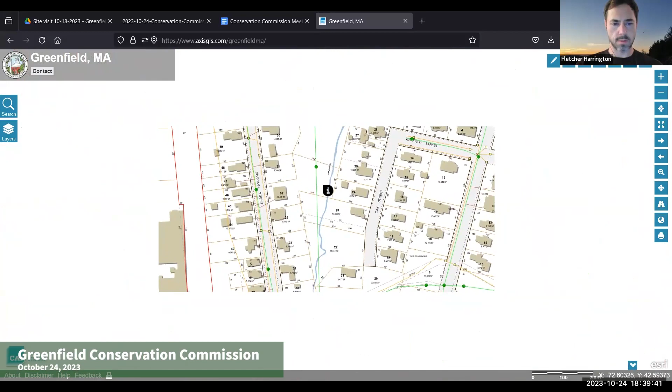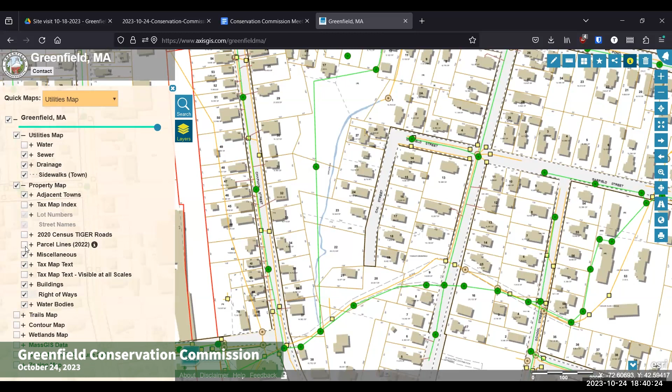Yeah, I'd agree with that. Definitely nothing running right now. And if it's not running right now, I do stream stuff for work, and all of our streams are extremely high right now, all year. Mitch, did you see a defined channel that was just dry, or was it less obvious? From the photo, it was just a stretch that was especially wet. Yep, that's it. Got it.

So it seems like, for Wetlands Protection Act purposes, it's probably definitely not a riverfront area. But if we think it's an intermittent stream, then it would be riverfront area for our local ordinance. Although, I'm curious, has this been delineated? Is there an identified bank? And if so, is there identified bordering vegetated wetland? What are the resource areas that we're looking at here?

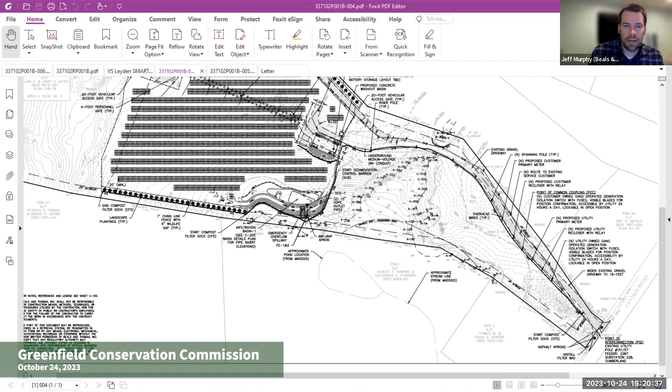And the next comment that they had related to doing soil testing to confirm these soils within the basins. So on October 11th, we went out and we did 5 test pits, 3 located in detention basin, or infiltration basin 1, and then 2 test pits in infiltration basin 2 at the west end of the site. And those test pits were done to confirm depth to estimated seasonal high groundwater, as well as the soil textures associated with each of those basins.

And we confirmed that we did have the adequate required offset, greater than the 2-foot minimum, to seasonal high groundwater. The soil textures that were encountered during the exploration were slightly different than our original design assumptions. So we updated the stormwater calculations to reflect the corresponding Rawls infiltration rate associated with that soil texture. And the basin design will continue to work as originally designed.

So I wanted to share a little more zoomed in view here of the basin, so you can see where that is. And the buffer zone here, as you can see, is kind of located just to the north of the basin, and it's situated here at basically the low point at the southeast corner of the existing hayfield. So our limit of work is entirely within the existing tree line, an area that's been mowed and maintained historically.

And our basin is located generally to fit the topography and the natural landscape, as well as the drainage patterns that exist out at the site, to really just work with the natural topography and provide infiltration and beneficial recharge to the adjacent wetland areas. And we have the outlet areas of the basin situated at a point farthest from the wetlands.

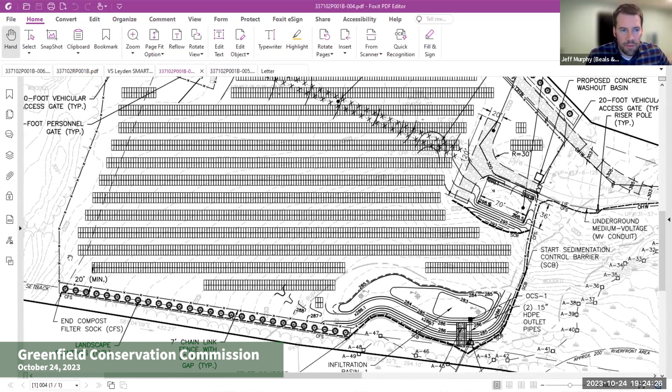One of the other comments requested confirmation of access to the basins for maintenance. So the detention basin 1 can be accessed primarily from the south. There's going to be a proposed gate here that will allow you to traverse the western edge of the array, and then along the south side of the array and get to the basin from that side.

And similarly, from this T turnaround area at the main entrance to the site, there'll also be room around the perimeter to get down to access the basin for periodic seasonal mowing and typical maintenance. And we also updated the stormwater report to go through, just documenting each of the typical LID considerations that are included on the stormwater checklist.

So I'd be happy to go through those if you would like, but in general, it's more just documenting the process we went through when working to develop the design of the stormwater basin, which is a fairly straightforward infiltration design.

And as noted, in addition to the Mass DEP comments, we also received a final letter from NHESP related to the state listed rare species, and the letter indicated that there would be no resulting take or adverse impact to the state mapped rare species.

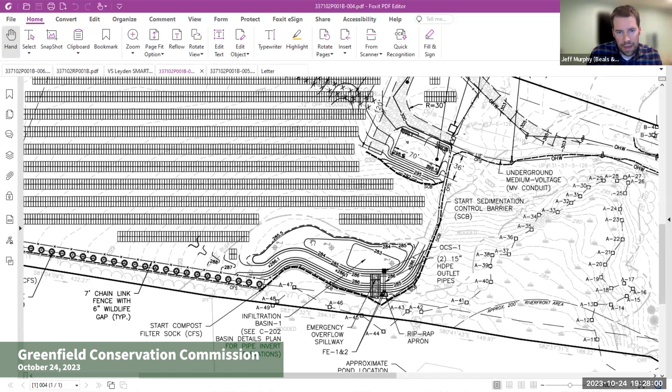So we're basically just going to build up an earthen berm, and then that water that flows across the grass meadow of the solar field will get captured here and directed down to this kind of low point, which the bottom of the basin is essentially set at the existing grade. So we're not really cutting down the grade at all.

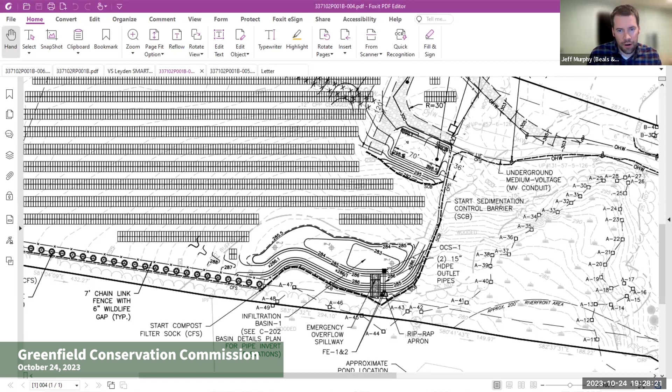It's more or less allowing it to just flow in the way it is today, but the berm basically will hold back the water, and then we have an outlet control structure here. Let me go back to that other sheet. The outlet control structure has a series of cutouts in it. So this is kind of like a front view of the outlet control structure. So it's going to allow water to pond up 4/10 above the bottom of the basin.

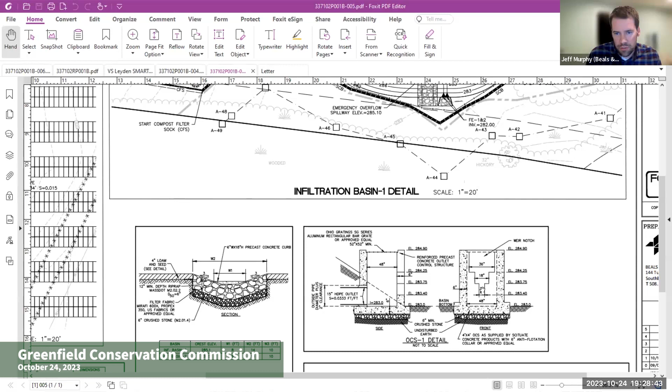And then once it reaches that point, it can start to flow out through these various notches in the outlet control structure. And then that flow will subsequently flow through two 15-inch outlet pipes into a riprap dissipation apron. So it really just tries to corral the water, and then it releases it in a slow, kind of controlled manner, consistent with the current drainage patterns.

And there's pretty minimal flow that'll come out of the basin, even in the 2 and the 10-year storm. So it's essentially going to be doing what it is today. It's just that we'll be allowing it to pool and infiltrate in this area, which will then kind of feed the hydrology of the wetland consistent with the current drainage patterns.

Thank you. I guess I was wondering if you could explain why you designed that infiltration basin to be within 30 feet of the wetland and not 50 feet or 100 feet from the wetland if you're already using existing topographic kind of subwatershed shedding.

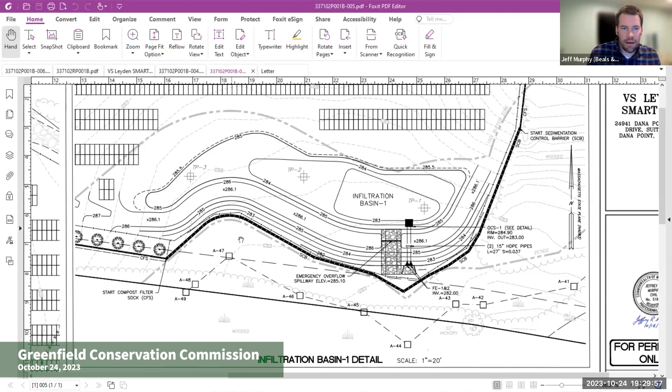I mean, it's basically an exercise of trying to work with the features that we have on the site and provide something that's going to reduce the amount of overall grading required. If we're trying to move it elsewhere, we may need to do more grading than what we have currently proposed.

So we're trying to just allow the water to flow to the area that it naturally wants to flow, and then just create that berm at the down gradient most point, because that's where the water is naturally getting collected, and it requires the least amount of grading and redirection of water to have it where the water is naturally going right now, if that makes sense.

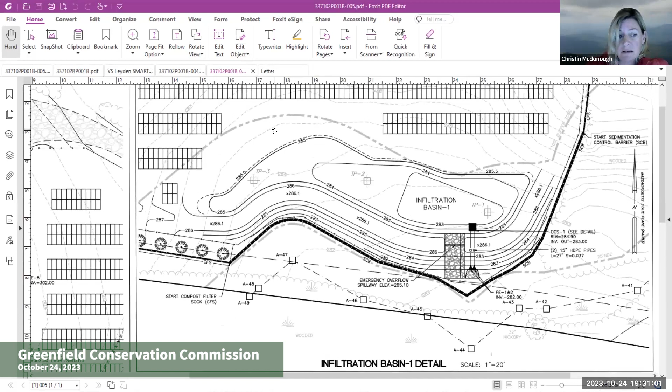And then can you just talk about the pretreatment? I imagine you're meeting all the performance standards, but can you just touch base on that? I don't know if we have any members of the public present, but there have been abutters present who are concerned about this in the past, and I just wanted to make sure we're addressing that publicly in a hearing.

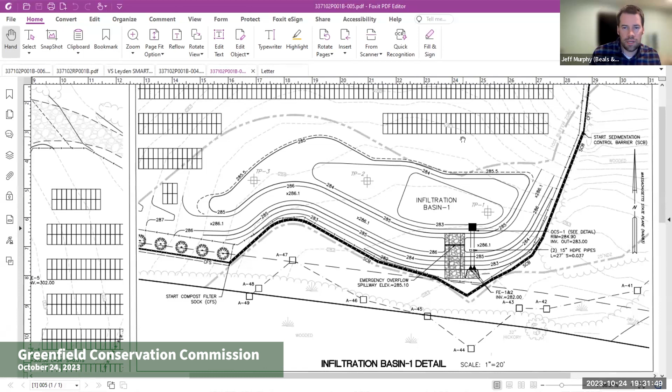And the basin itself allows for TSS removal and treatment of water as it's coming off of the site, and the grass vegetation will help that as well. Can you give us the percent of TSS removal? Are you meeting 80%, 90%? So yeah, the basin will provide 80% TSS removal by virtue of its design, the infiltration basin.

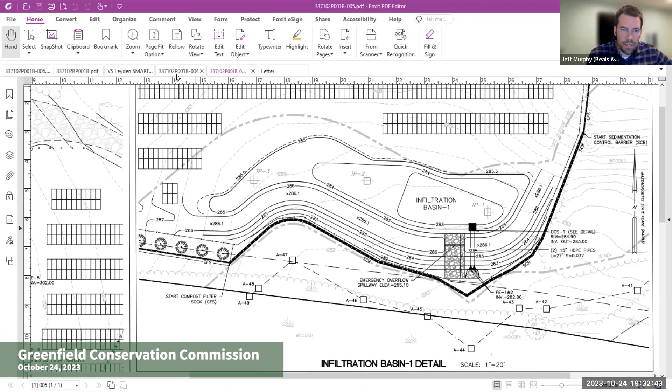And we're not proposing any paved areas that would require typical methods of treatment. We're not going to have a paved parking lot where you would be required to have catch basins with sumps and things. It's all going to be vegetated with grass, and our access road is going to be gravel, located on fairly level terrain, and all the runoff from the road is going to be directed to the basins for the most part, within the array area.

I had a couple other questions. Sorry, guys, I'm being an oxygen hog. Go for it.

So you said you received a comment letter from Natural Heritage. Is that a take avoided through conditions or a no take? It was a letter of no take. So we had submitted it for the combined NOI and NHESP review. And it was a letter of no take, and they did not provide conditions.

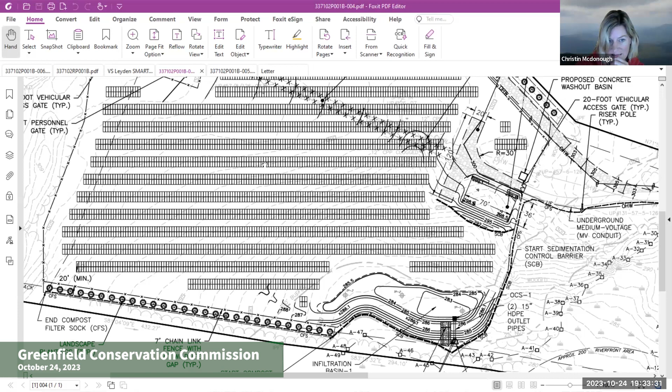Oh, wow. Okay. And then I just had a question about the dual use agriculture, because I'm really curious and I haven't seen a whole lot of that. I'm just curious what your dual use is. Is it hay field, and how high up are the panels?

So perhaps Colleen, you can explain a little more about the proposed dual use aspects. Sure. Hi, Colleen DiBenedetto. I'm a development manager with Volta Energy. Right now we are considering grazing, or some sort of plant-oriented project. We haven't really come to a decision yet.

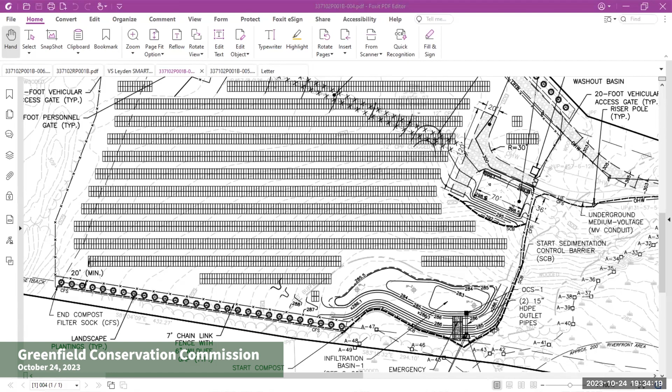If you'll note, Jeff, if you can just move that site plan a bit to the north. Yep. We have provided a turnaround for a shepherd to bring his sheep in periodically to graze. So it's been designed for grazing. However, we have not come to a final decision of what the model will be. Right, because that's what I'm the most curious about. How high are these panels going to be in order to have a successful dual use?

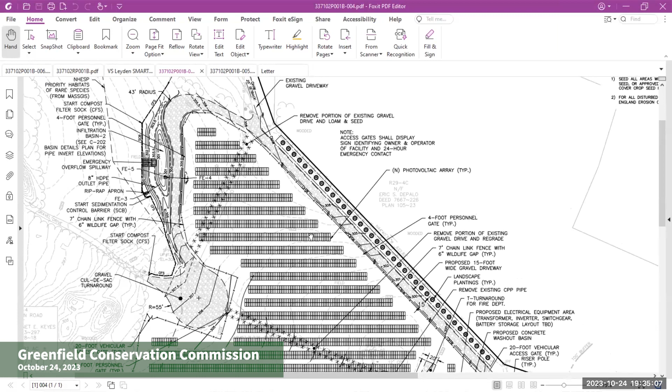So it depends. We might need a lower edge of the lowest panel anywhere between 36 inches and 4 feet above grade, depending upon the use. And does that change the stormwater runoff calcs at all, Jeff? No, so the stormwater is basically the same regardless of the panel height, because really you're just looking at the ground cover type underneath the panel, which is still going to be a grass meadow.

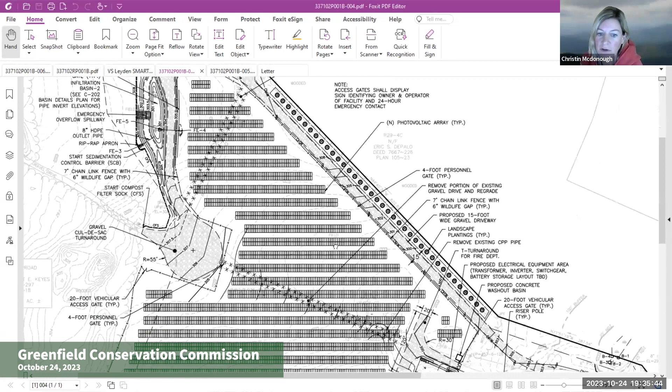But does it affect like a drip line or anything like that? Because I imagine if a panel is significantly higher off the ground and it's tilted, that could affect maybe a drip line, and we don't have gravel drip pads. I mean, it really isn't ever an issue for the most part. Once the site gets fully revegetated with grass, anything that drips off is going to just be dispersed into the grass vegetation. So I don't anticipate there being any issues with drip associated impacts.

On that note, I imagine the panels are tilted south. Yep. So the low side would be on the south side here, and the high side would be on the north. Yeah, they're set at a tilt, and they're stationary panels, not tracking. Like they don't track the sun at all. That's correct. These are fixed panels. Okay, but I'm just curious,

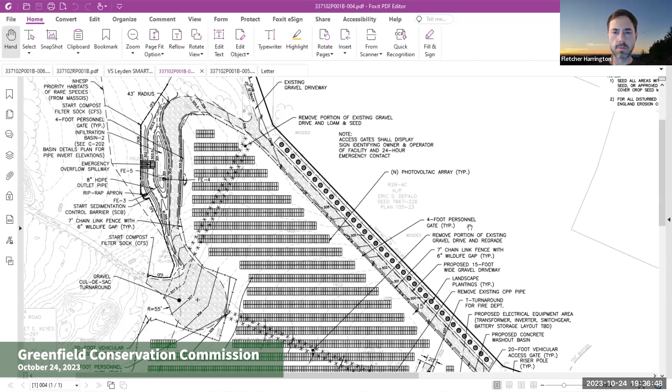doesn't rain running off the panels accelerate the sheet flow moving down the hill? I mean, no, not really. Anything that hits the panels and runs to the low side is going to drip off in kind of random droplets. It's not going to be any sort of concentrated situation. Once the vegetation grows in, it's just like a drop of rain falling from the sky, just coming off the edges of the panels in a line of droplets, more or less.

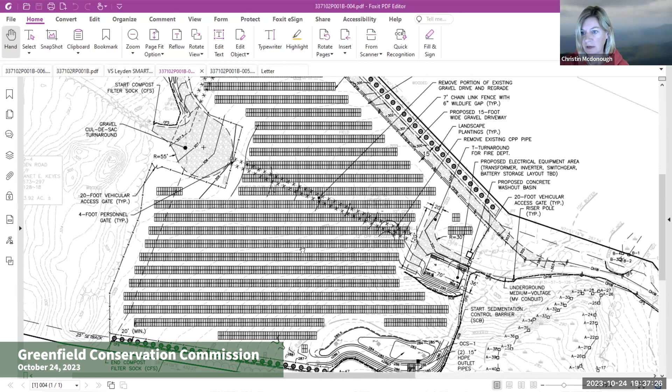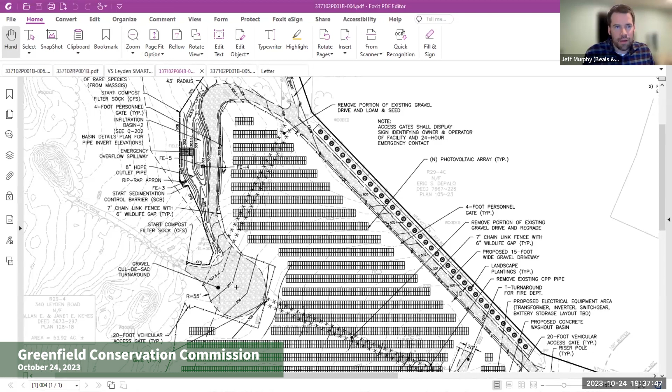Well, I see. That's kind of why you have to have stormwater. If that was true, you wouldn't have to have any stormwater management, correct? Well, the reason that we have the stormwater BMPs on this project is that we are relocating the existing gravel driveway, which runs through the middle of the site right now. The goal was to create a contiguous array footprint. So it's really only associated with the change in cover type from the relocation of the gravel driveway, as well as this turnaround and equipment pad area.

So I was just going to add, we got a little far away from this, but we do have a copy of that letter, Christin, saying it will not result in a prohibited take. We have that in our Google Drive files. And it also says the division recommends the applicant incorporate as appropriate the mowing advisory guidelines in rare turtle habitat, pastures, successional fields, and hay fields into the project operations management plan. I was just curious if those are being incorporated into the plan.

Currently they're not being incorporated only because, as far as I'm aware, I don't even know what this site is mapped for. I think there was just a recommendation because it is currently field habitat here. And the NHESP habitat is actually located, Jeff, do you want to just point to it? Yeah, it's this largely dashed line, outside of the limit of work.

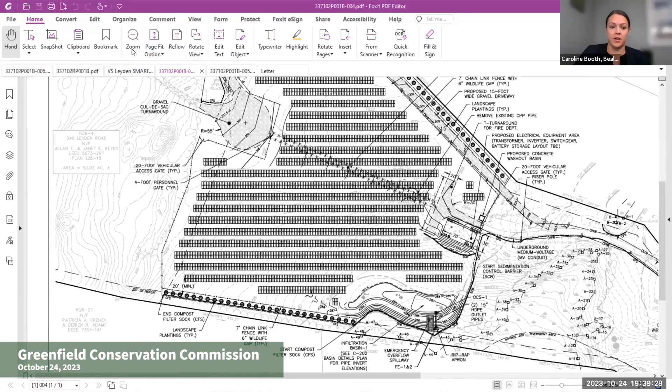But if the commission felt comfortable asking us to address that as a condition of approval, I think that would be all right as long as the guidelines line up with the intent of the dual use. Because the project can't be permitted as a dual use project and move forward under the dual use guidelines without being a dual use with the agriculture and the solar array.

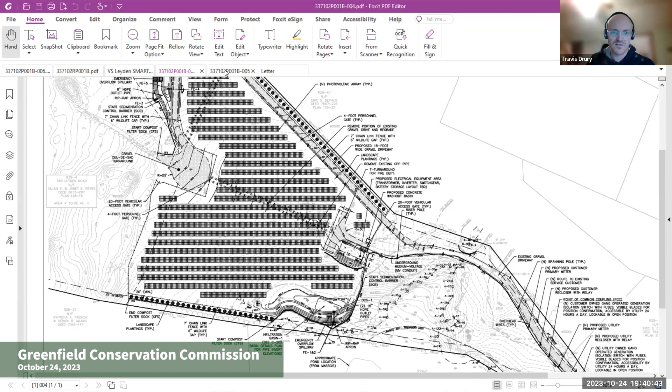And any other... Travis, yeah, go ahead. I was gonna say, do you have a printout there of what their mowing recommendations or guidelines are? Yeah, if I could share my screen, I could show you. So I'll just show you.

So this is the letter. It says it will not result in a take, will not adversely affect habitat. And then here's where it says the mowing thing, and then there's a link. I click that link and it takes you to these guidelines. It sounds like basically there's timing on when to mow. Yeah, that is typical. Sorry, Travis, not to cut you off if you were in the middle of a thought. No, go ahead.

I think that, like we mentioned, it's really just that small sliver that's within this habitat. So if it was to limit mowing times in that area, I can't speak for Colleen, but I think that would be something that could be addressed. I'd just like to add that currently this field is actively hayed. I think the landowner gets 2 cuts a year. So if the commission would consider that the landowner continue to have the field hayed, given his conventional standards, until such time that we commission the solar array, I'd appreciate that.

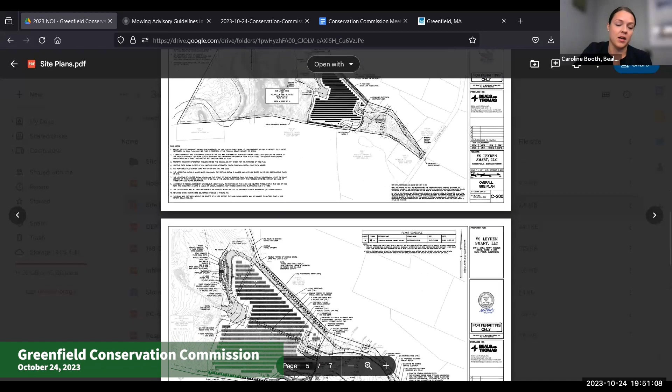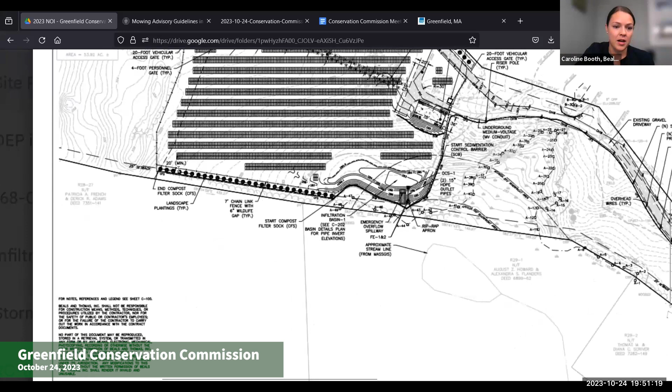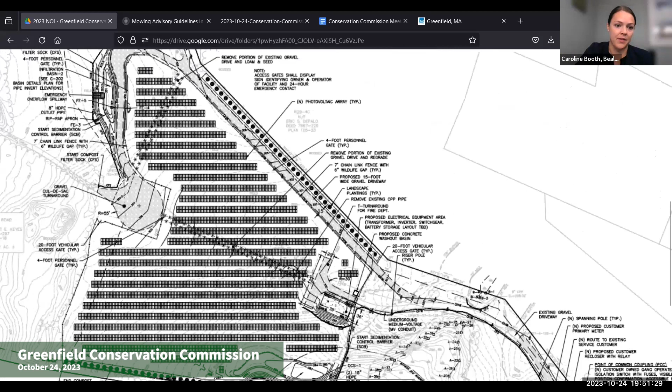Was this the project that was going to plant some red cedars or something? Maybe that was a different project, I might have gotten the projects mixed up. There are red cedars proposed. They're largely proposed for screening. It's one of the only things the deer won't eat that will survive. There are a couple of them located within the buffer zone there. As we noted, there won't be any trees taken down, so once they're established, it will just be an additional vegetated buffer along that edge.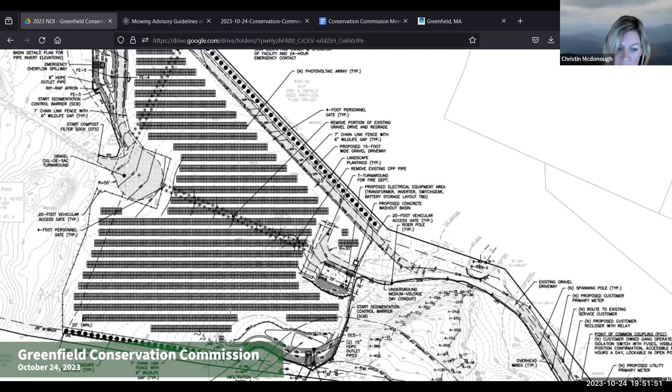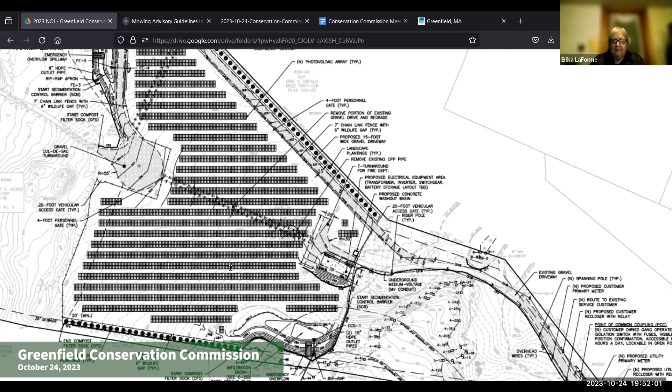Okay. Do we want to require native plantings within jurisdiction? Sorry, Christin, could you start that again? I was just curious, Erika, if you were getting at whether you wanted to ask for native plantings within the buffer zone? Mostly I was getting at where exactly they were going, and where's the little area where a few trees are coming down? Is that where the road is being moved? Yeah, that's outside of the 100-foot buffer zone, but you are correct. It's the area where the driveway will spur off to the northwest. There's a hedgerow of trees there, and a few will have to be removed to relocate that driveway.

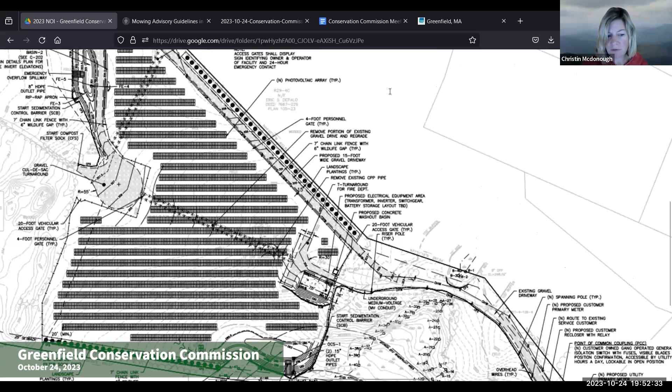Well, back to Christin, are those native? Is that something the planning board was requiring for vista screening? It is a zoning requirement. Does it have to be coniferous, or why did you pick that species? She said because that was the one that wouldn't get eaten. Yeah, this was selected by one of our landscape architects who is more familiar with this than I am. They just tend to have a better survival rate for establishing, especially in these areas that are already wooded.

Yeah, no doubt arborvitae get gobbled up by deer, and we hate arborvitae, so no complaints that they're not arborvitae.

Any other questions or comments, or anyone want to make a motion? I just want to clarify for myself, I know we talked about this, but we haven't talked about any special conditions, it sounds like, if we were to issue an order. Got it. I'm not convinced that commissioners don't have any other questions, or else I'd make a motion. Any other questions? Going once, going twice? All right. I'll make a motion. Actually, I was going to make a motion for an order of conditions, but that's not...

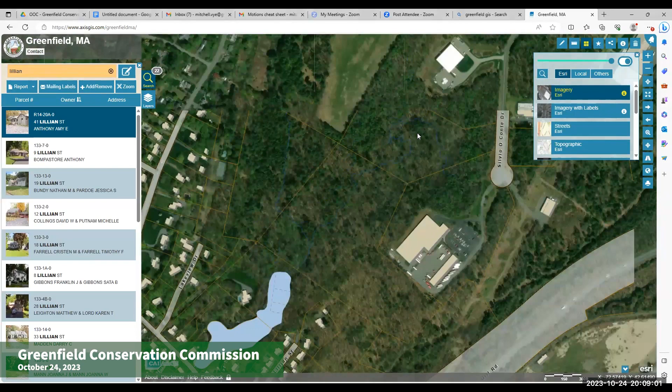So next under other business and enforcement updates, there was a thing about ATVs at Lillian Street Conservation Area. Mitch, do you want to tell us what that was about? Yeah, so someone heard motor vehicles being used. He wasn't sure which properties were ours, but it sounded like all of these wooded properties here. He said they might be entering from way up by the right of way, coming all the way down. I was thinking for now a sign, but we do have a sign there that says no motor vehicles. So I'm not sure the next step, but figured we should bring it to your attention and talk about what could be done.

You said you went out there and there weren't signs of trail erosion from them? No, everything looked normal. I would say personally, if you scheduled on your calendar a visit in the spring, maybe an April visit to check on it, that might be a good idea. But if we've already posted no motorized vehicles, there's really only so much you can do with ATV-style trespass, short of rock barriers, which they'll still get around.

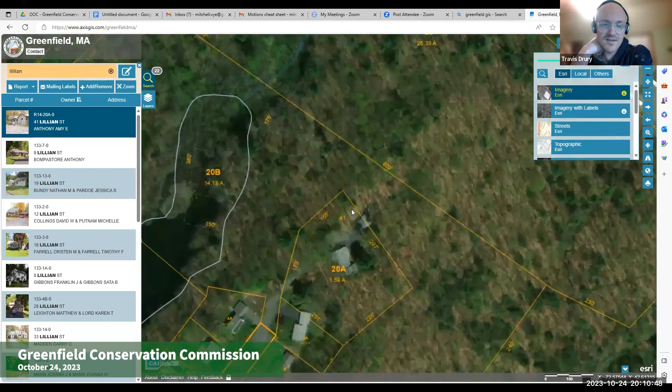So what about a fallen tree? Can they get over that? Are we talking dirt bikes or four-wheelers? He wasn't sure, he didn't see them. A big tree would probably help with snowmobiles or something. Snowmobiles though are probably okay, maybe not by the book, but as far as erosion and how much damage they do. Yeah, I think it says no motorized vehicles. And Mitch, the sign is out at Lillian Street, right? Yeah, it's right at the entrance.

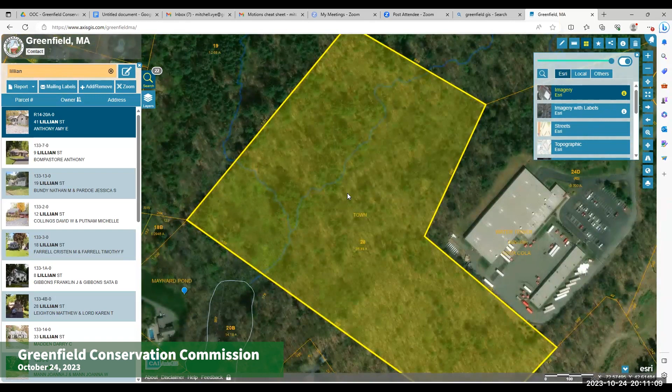So I guess to me this kind of goes back to where, at some point, I'd like to get to boundary marking, like boundary markers, and maybe if there's a trail that comes in from off property, a little sign that says what's allowed on conservation property. Yeah, that's probably the best thing we could do. They may not know that it's conservation property where they're coming in. They're just driving around.

Mitch, have you had a chance to check out any potential boundary marker orders? Yeah, we should get back into that. I'll see if I can get some quotes. That'd be good. Do we have a design or no? We can go over that, if we just want to say conservation area, no motor vehicles. Well, I think they'd be separate. We'd have a standard boundary marker for the commission and then other signage as needed. But I just didn't know if Greenfield Conservation Commission had one.

I mean, I doubt we have a digital file of it, but maybe we have some existing ones out there that I can't remember. Yeah, I have roughly one pinned. I just don't know where it came from. Okay, I have one. I thought there were some out at Griswold. Do you remember, Christin? I think there are some out there. That's where I remember seeing them, but I don't remember what they looked like. I think they just said Greenfield Conservation Area or something like that.

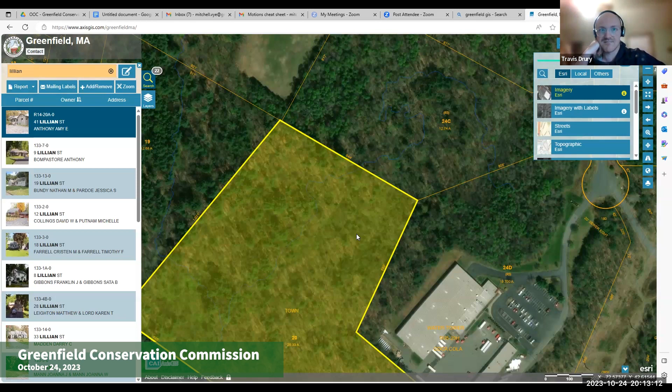I think we'd want to get a bunch of those, and we could use them at all of our sites, or some of them, and then maybe some smaller rectangular signs, or bigger than the boundary marker, but some rectangular signs that just say Greenfield Conservation Land, and then what uses are allowed or not allowed, I guess.

But back on that land, what was the complaint? Are they hearing them frequently or is it one time? Yeah, it sounded like more than once. I'm not sure. It's kind of hard. This is where conservation land management is a hard thing, right? How do you enforce these things? Technically, I think people can be fined, but if you're not out there when they're doing it, how are you going to find them? The state has a whole environmental police division, and they can't figure it out.

So I think let's just make sure it's posted. Posting, and then if it really was a big problem with erosion and stuff, I think that's where maybe you start to get into what kind of barriers you can put up to try and make it more difficult. But it sounds like it's not really a big erosion problem at this point. So for now, more boundary markers and signs, and just inspecting it more frequently.